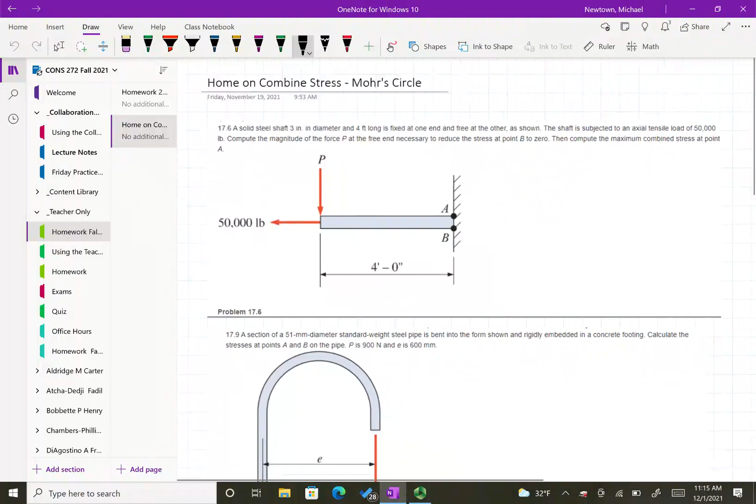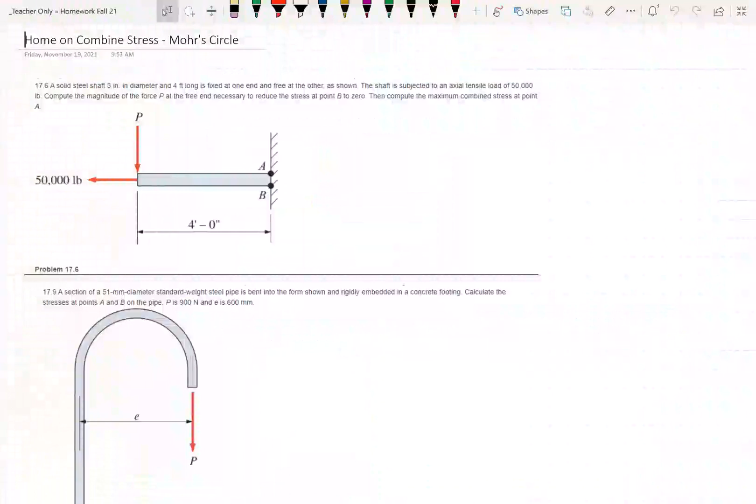Okay, so the first problem right here: a solid steel shaft, 3 inches in diameter, 4 feet long, is fixed at one end and free at the other as shown. The shaft is subjected to an axial tensile load of 50,000 pounds. Compute the magnitude of the force P at the free end necessary to reduce the stress at point B to zero, then compute the maximum combined stress at point A. So what's this actually going to do? Think about it this way - let's use green. It's going to come off the wall and it's going to go like this.

We want the bottom side here to be 0 pounds per inch squared, fair enough? And A is going to be something, because it's going to be in bending. So we're going to put enough P, enough force on this end to cause some stress at A, but have 0 stress at B, so there's no compressive stress at the bottom.

Let's see what else we want to do to make that easier to set up.

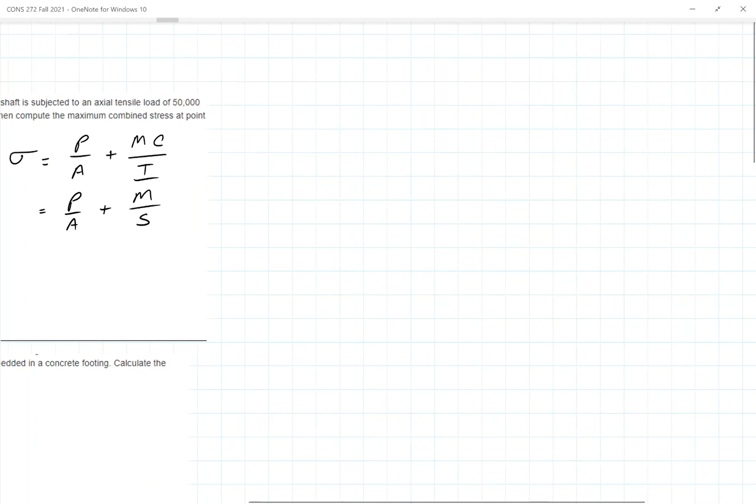Remember that image, so first thing we got to do is find A. I'll give you this one, and that's going to come out as 7.069 inches squared. And if we use S, it's 2.651 inches cubed. And then we need the stress in tension, and that would be 50,000 pounds divided by 7.069 inches squared, and that's going to give you 7,074 pounds inches squared. Everybody with me so far?

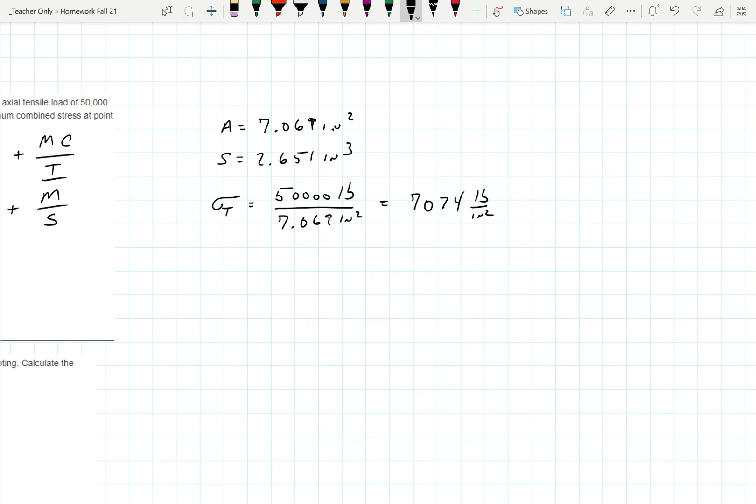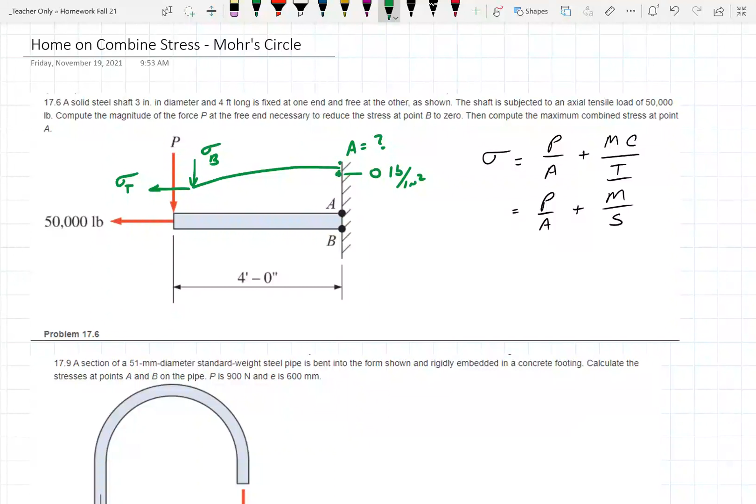Because literally we're looking at, ooh, here's something else I'm going to do for you. In the world of design later on, not in this course but in design, we're going to worry about that as sigma t and sigma b, and that'll help you sort out things too. So we change it from its force to its stress, and that'll help label those things. So that's my sigma t here, actually it's sigma total, but sigma t over here.

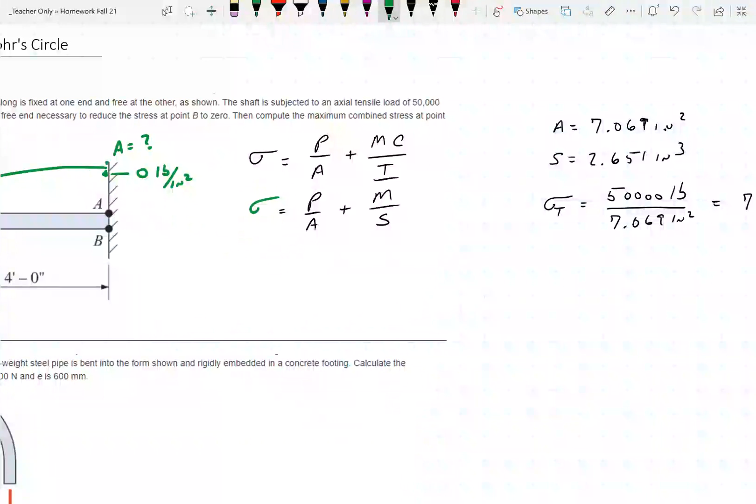All right, now for my sigma bending, we're going to use M, not C, I'm going to use S. But this is plus or minus, because whatever this bending is, it's going to be the same top or bottom if we balance this out.

Oh, why is my mask bothering me today.

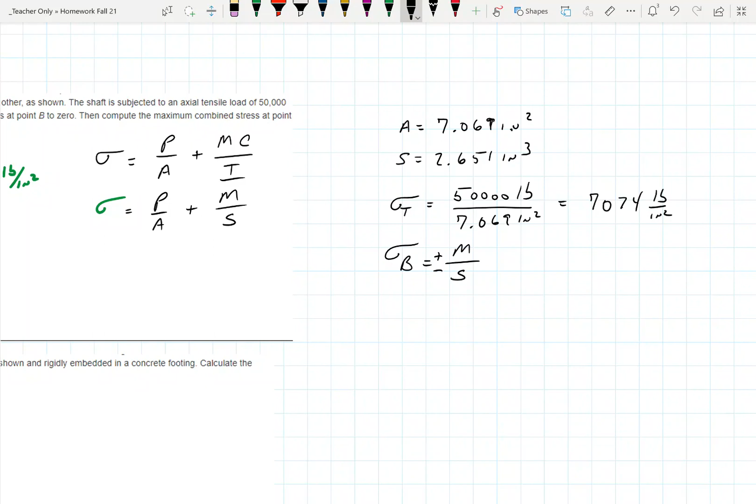All right, so in order to get to this, we got to look at 4 feet, 4 feet. So my M is going to be equal to our P times 48 inches, so we can keep everything in inches here. We could have used 4 feet, but then we got to divide it by 12, so I'm just going to go to 48 inches. And my S value, which will be 2.651 inches cubed, and literally I wind up with a plus or minus 18.106 times P.

So far, so good? Okay.

So my sigma in this whole bending equation is this: sigma t plus or minus sigma b. And remember where this came from, this is P over A plus or minus M over S.

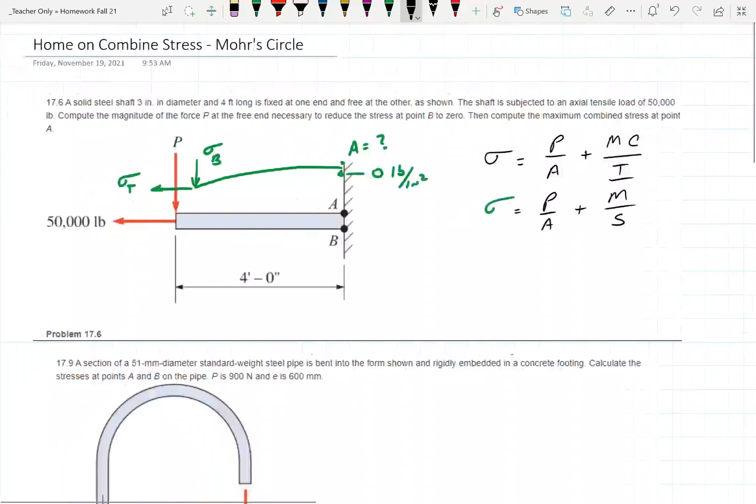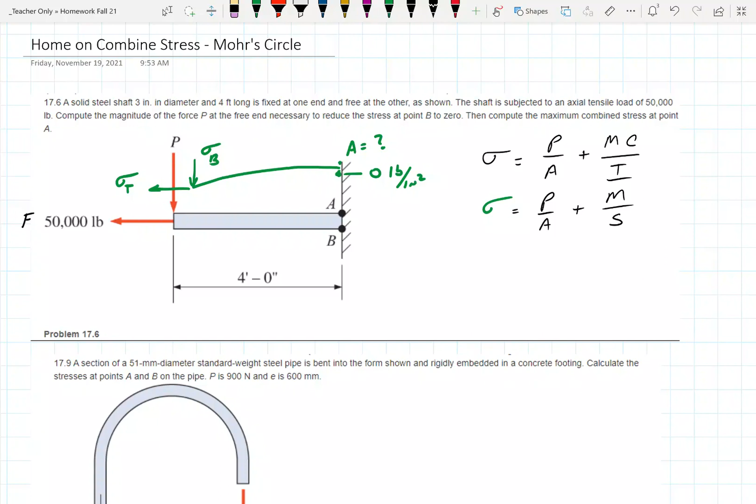The reason to do this in 2 parts, though, is those P's aren't the same. So if I was doing this for myself and not a problem out of the book, I'd have made this F instead, just put F, that way we know it's not the same P. Make sense? So over here, make that F. And then this P that's here is still the one causing just my bending.

All right, so in order to do this, we want to set up 7074 pounds per inches squared. Point B is going to be on the compressive side, right? So that's going to be minus 18.106 P, and we want it equal to 0 because we want to know that there's no stress out there at B. Make sense?

Okay, now it's at Carter. Stress level on the Carter scale, 1 to 5. It should be 0. Should be 0. Okay, they all are.

Everybody good so far?

This problem's a little neat because it actually works things backwards a bit, but it'll still get you where you're going. So anyways, we can solve for P when we do all this, and P should come out to be 390.7 pounds. Okay? And that should be in compression.

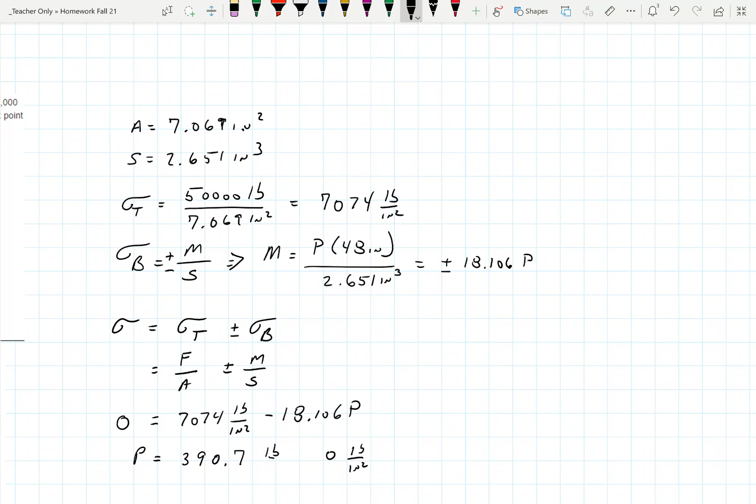Actually, it's not in compression because it's not a force, but that's the one that's going to cause 0 pounds per inch squared at B. That's because of the compressive side of that.

Make sense? All right, now point A, so I guess this is point B. Point A is going to be sigma equals, I'm going to go F over A just to keep this straight, plus M over S, F over A plus P times 48 inches over the S, okay? Now this P right here is that value right there, right?

Concept here that's really tricky, right? We have this, yes. But what I'm really interested in here is that you know that P pushing down on the end of that cantilever is only the P that causes the 0 stress at point B, right?

Good load. Okay, so we plug in the 390.7 pounds, and we're going to get this. So 7074 pounds per square inch plus 390.7 pounds, and that's 48 inches.

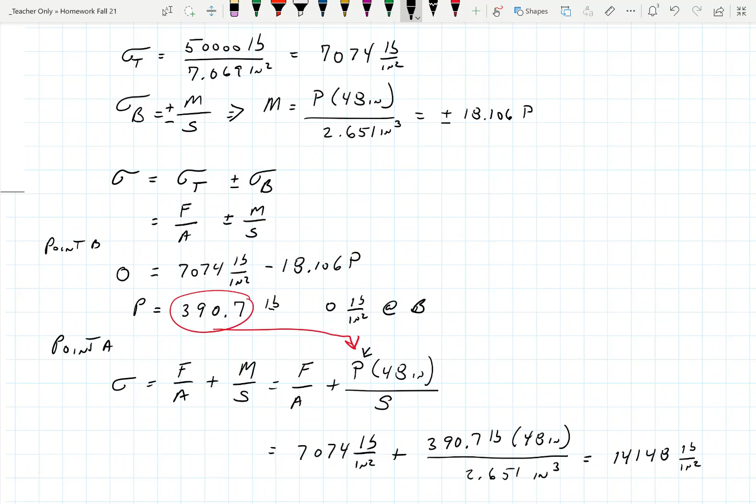All right, so back over to this guy. We did a problem like this someplace, didn't we? I would have not given it to you if we hadn't.

P is 900. Yep, so this is 900 pounds. Okay, we got an E distance here. They tell us what E was. Yep, E is 600 millimeters. Okay, which honestly, do yourself a favor, turn it into meters. That's not 600 pounds, it's 600 Newton, or 900 newtons.

Okay, and what's this actually going to do? Anybody got an idea? So when we displace this thing, we're going to bend it kind of like this over. Okay? So we're going to have one side of that pipe in compression and one side in tension, right?

You see that, Fadil? Tyler?

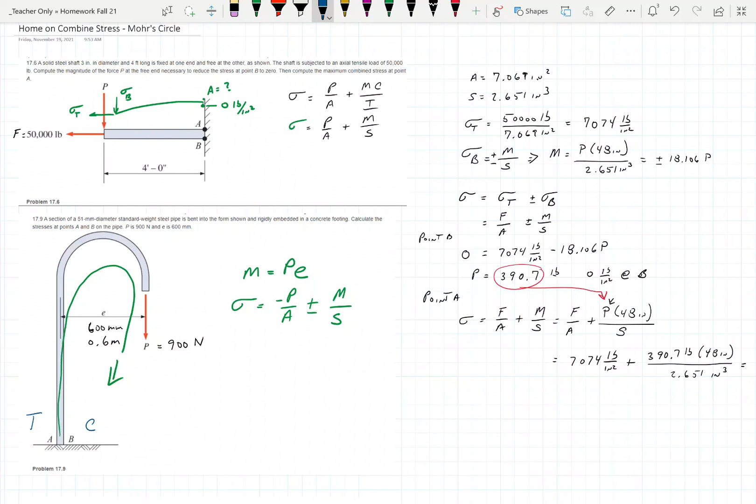All right, and the last one is really about Mohr's circle. So again, just like we did the other day, find your average, find your R.

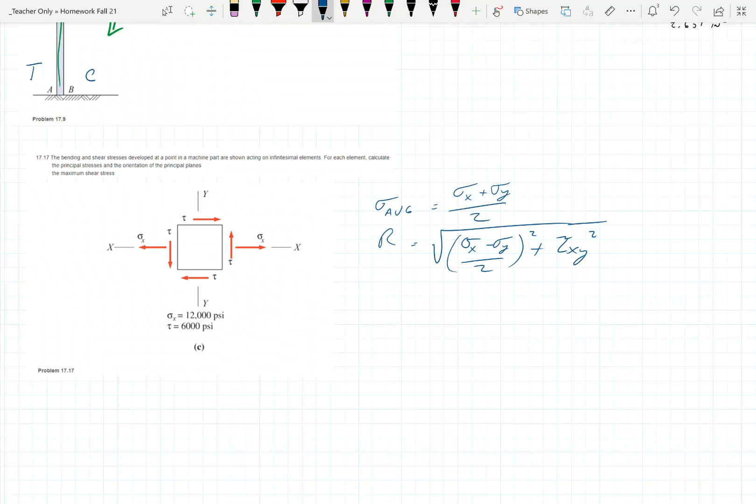They didn't ask you to find the angle, did they? Should be pretty easy to do. There's no Y, there's X and tau. Easy peasy. All right, and when we're done here, I'm going to send this to you.

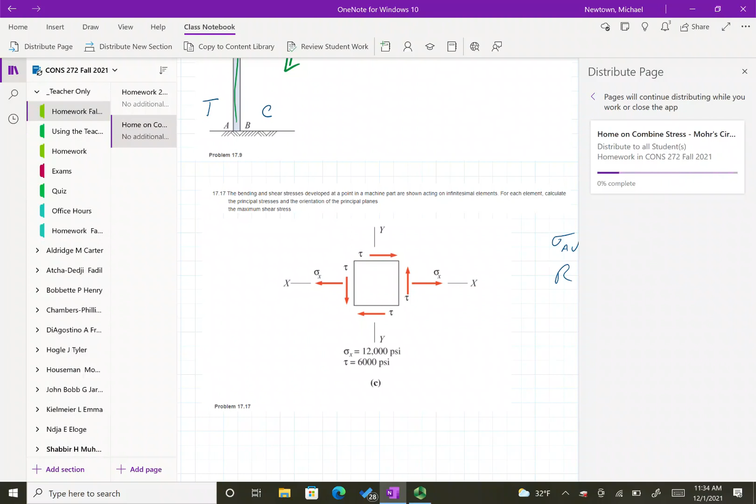So it shows up right here. Oh, it hasn't got out there yet, but that's the original one. The new one will show up on top of this. And there's the one I wrote on.

Okay, so Mohr's circle, everybody fairly comfortable with now? I mean, I know on the homework, but anybody struggling at all? Then let's move on.

We can have some fun. All right, beam deflection. And every year I look at this setup and it's like, this is ridiculous.

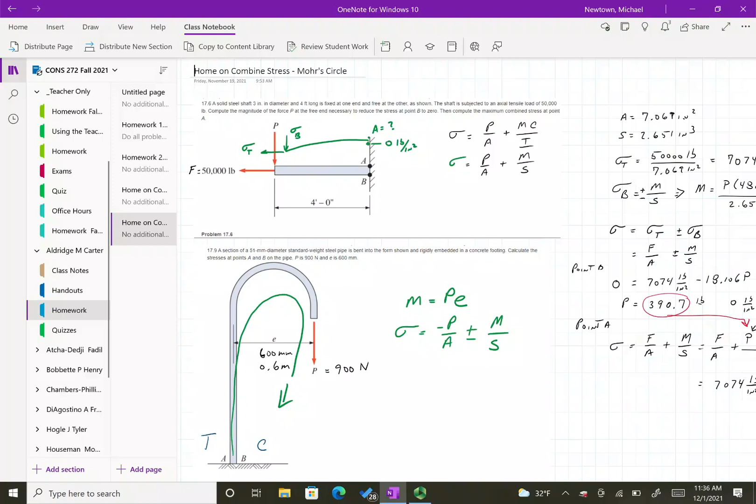Let's see, get out of there. Lecture notes and so beam deflection.

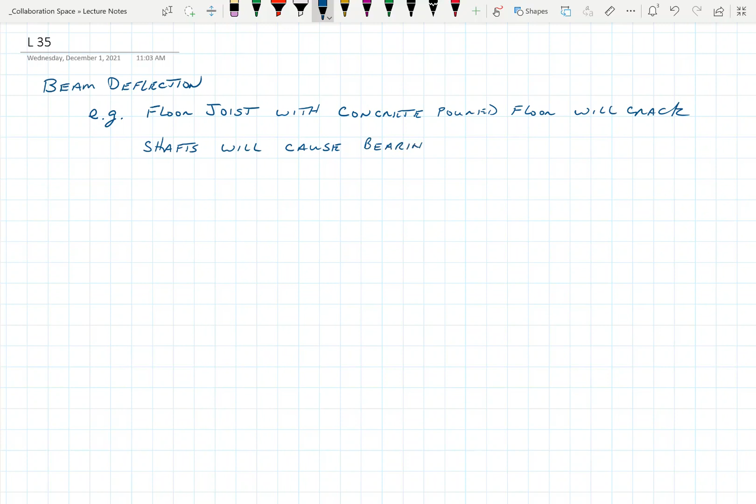So there's just a few examples of why we're interested in beam deflection, okay? And you've probably experienced this, but may not know it, okay? But if you stand on a floor, on a wooden floor joist in an old house, you jump up and down, and the floor starts to sway underneath you, that's deflection, okay?

There was a great ad when I was a lot younger. Company called Trus Joist. Their claim to fame was they could put an elephant on the floor and it wouldn't deflect. And it was the stuff with the plywood centers with 2x4 top and bottom, and it was strong, and it was quiet because it didn't squeak, and it could take an elephant. Like, cool, I can make any floor hold up an elephant, you know.

Just gotta give me enough material and I can do anything. But their kind of thing was it was lighter, it was easier, and it was a time pushing towards the environmental side of not using so much raw lumber. Because they could literally saw short pieces up and glue them together, and then the center, the first ones came out as plywood, and then they changed them to OSB, and I think they're still OSB now, oriented strand board. Okay, we're basically using chips and other things to make parts and pieces.

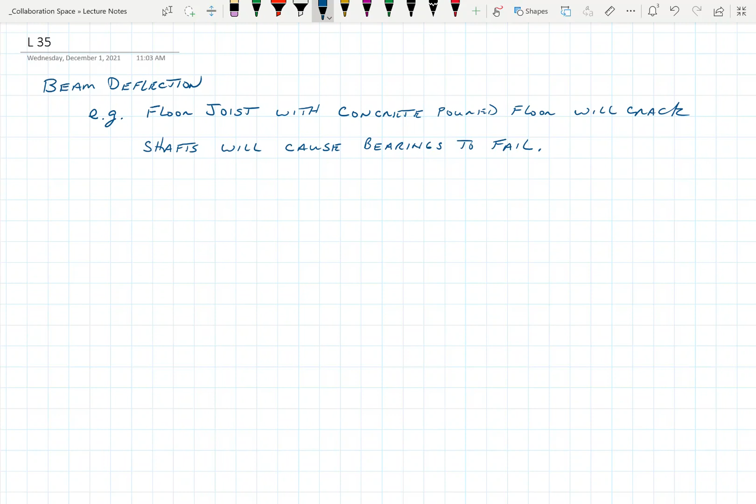Okay, but what we're really interested in is how this thing deflects. So think of it this way, and I'm going to use a ruler to make my life just a wee bit easier today. If I have a beam like so, and I bring it up like so.

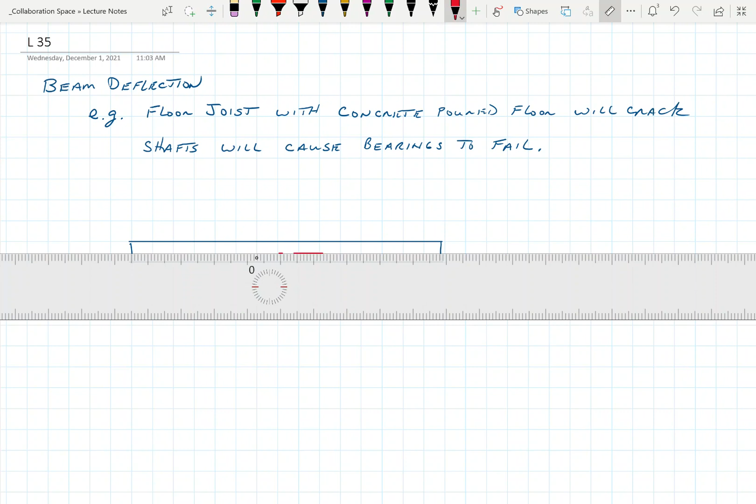Okay, and we box it off, and I have a center line, like so. We got our reactions here, okay? And we put a load right there, okay? This thing, when it's all said and done, should do this, okay?

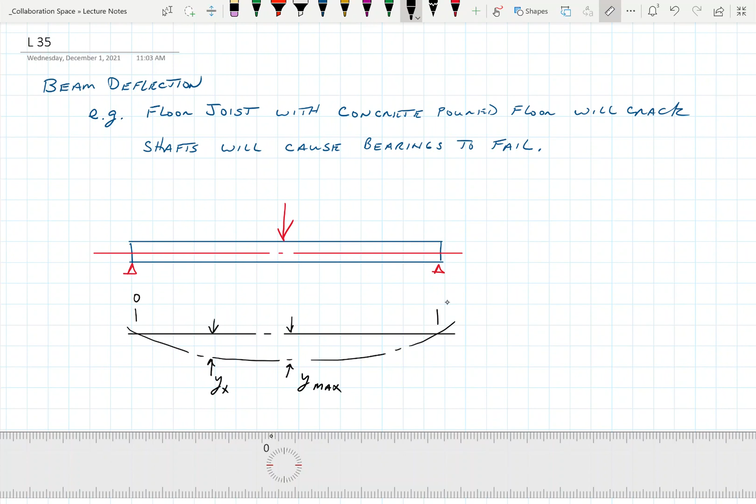It'll deflect from its center line based on a vertical movement from the center axis, or the neutral axis, to y. And it could be a y of x. And by the way, so this will be 0, and this will be x is equal to some length L. Okay, so far, so good?

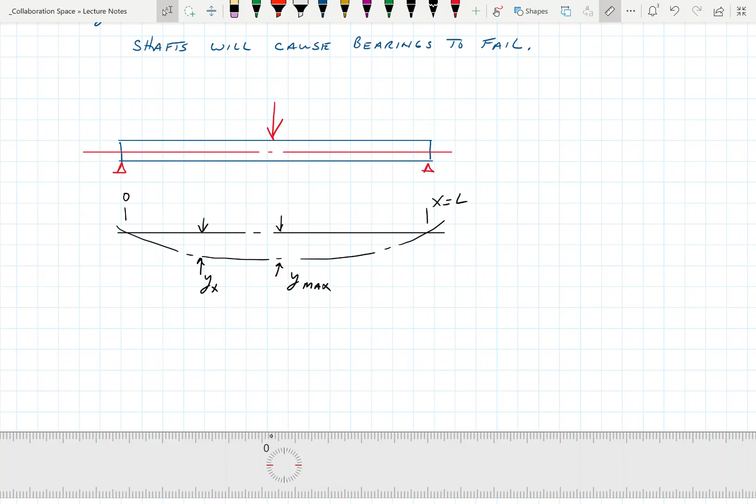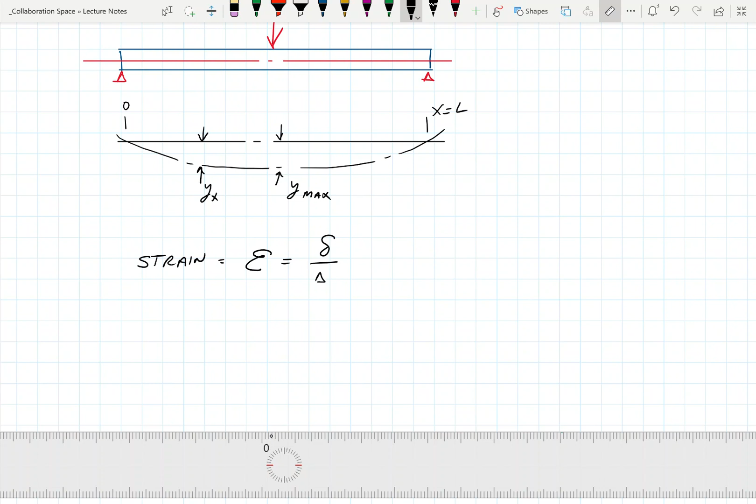All right, now there's a couple things that play in this, and I'm going to try and simplify this, because every year I do this, I really keep thinking I want to simplify it. We know this happens, okay? So here's some given facts: we have strain, okay, which is epsilon equal to the delta over the delta L, okay?

And then we have stress, is that. Can everybody buy that? Remember way back in the beginning, yes? Okay, and then when we get all this said and done, we have...

Remember that? Scary, huh? Realize we've done 13 weeks and we've come right back to the beginning.

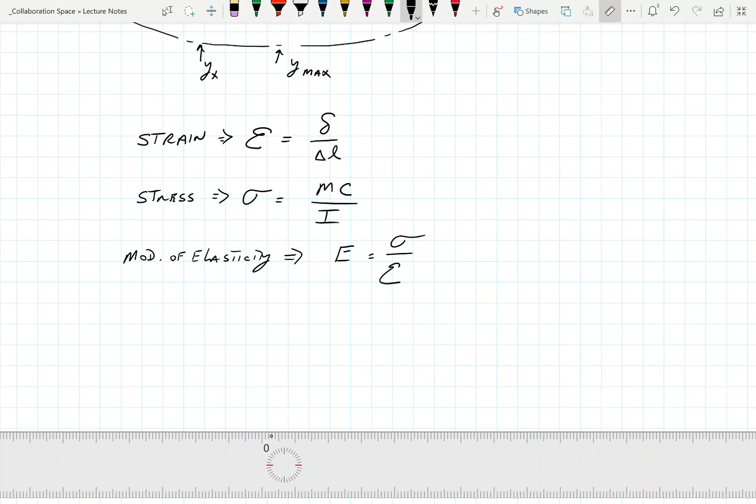Never goes away. All right, now if I take these and I rewrite this equation, I'm going to get M C over, that's delta L over the deflection over I, okay?

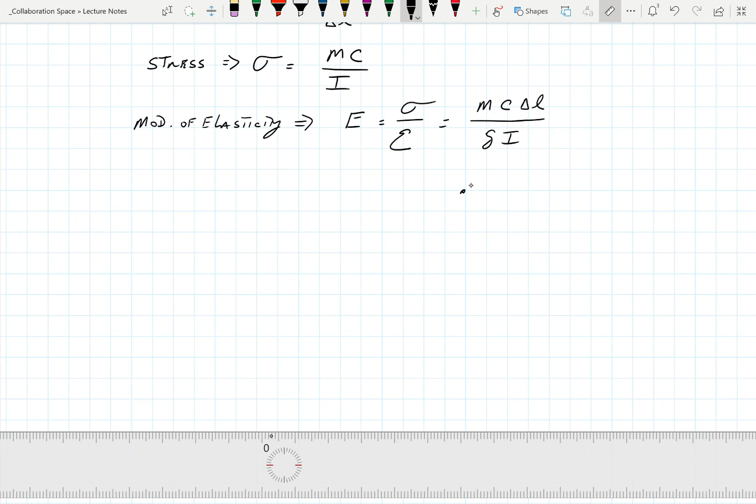Okay, so there's a whole bunch of trigonometry that goes with this. I guess I got to draw it in order to explain it. We got some point O here. This is going to have a radius to here. Okay, so as that bends, it's going to form a curve.

Can you buy that bit? Because if I get you to understand that, I don't have to do a whole lot of drawing here. So if it bends, it's going to bend in a curve, right? I'm going to support it out here, and I'm going to bend. I got a point, it's going to have to go in a curve. I don't know what it is, but every curve has an origin that it rotates about.

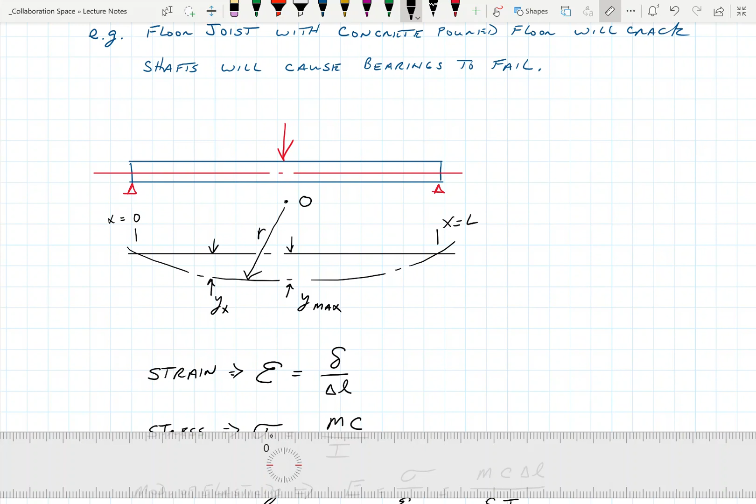Everybody else good? Okay, so with that, I have a radius. That's going to be critical to help finding the deflection equations we want to play with, because it involves all the trig and all the other fun things, but it gets really obnoxious when I go through all this and everybody looks at me at the end going, why'd you do that? So I'm going to skip the malarkey, and if you ever want to see it, I'd be happy to show it to you. But once you get through this, you'll never want to go back anyways.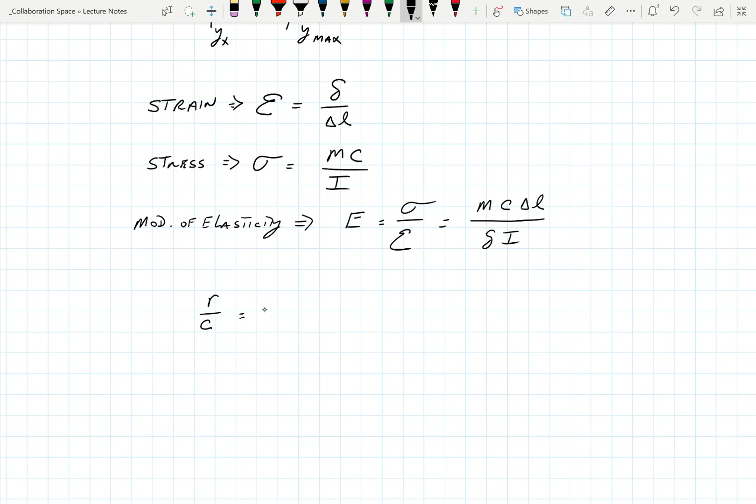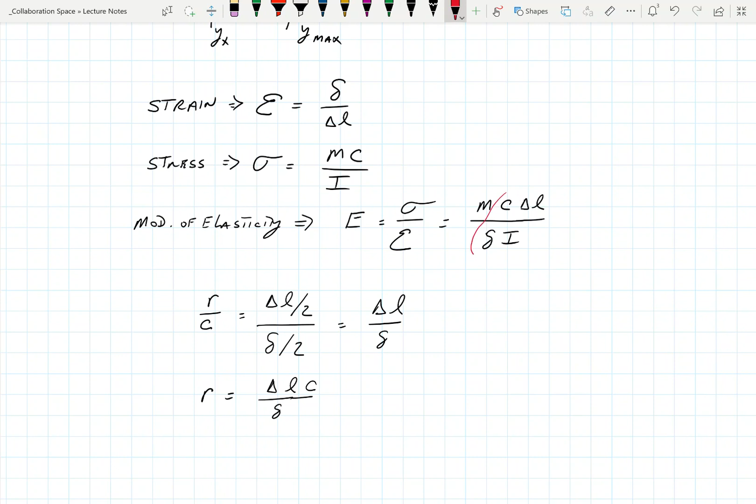So I'm going to take R over C, and set it equal to delta L over 2 divided by the deflection over 2, which is equal to that over this. Now when I do this, R winds up being delta L over delta times C. And that little bit right there is going to get us to the point where we can take this group of stuff out of there and put an R value in, the radius.

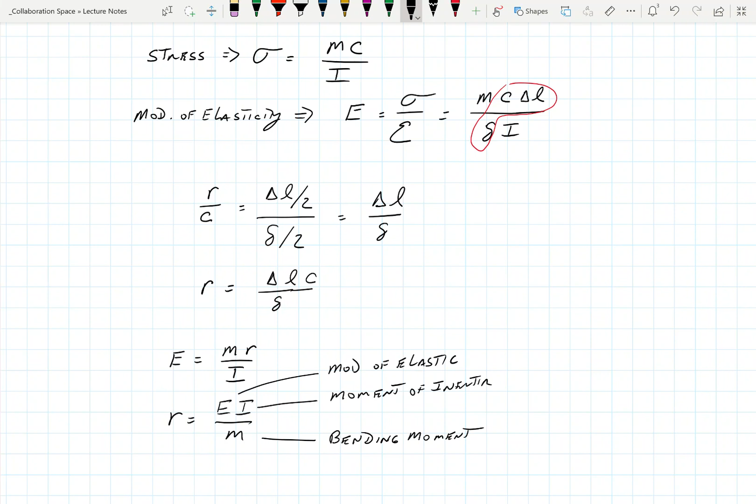So we're going to get E is equal to MR over I, and we're going to look at little r, E I over M. M is my moment still, okay? And I guess that's another thing - so now we're using modulus of elasticity, not Young's modulus. Okay, and those are what those are. Okay, let's see, what's the other one here? I got to put... okay, so here's a little note that I'm going to give you.

So that R is actually called the radius of curvature, right?